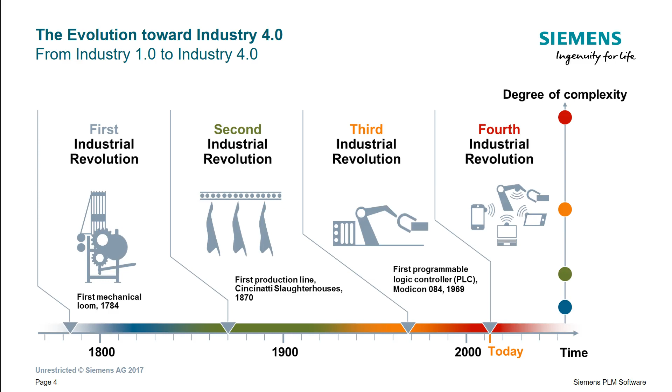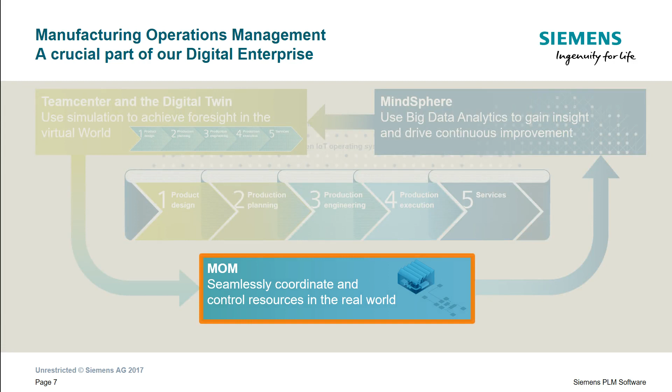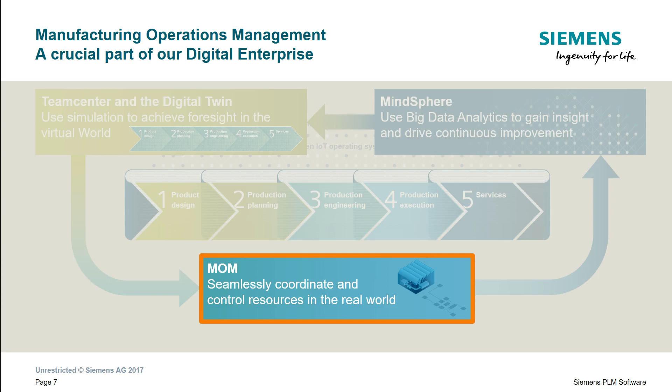Today I would like to focus on one of the three main elements of our portfolio, which is the manufacturing operation management part. This one is highly representing the realization piece, when we're talking about the manufacturing plants. Here's where we see a holistic view also, and this is what we call the orchestration of all the disciplines within manufacturing.

So when you start with the download of any customer order that you get, and break it down according to your capability and resource availability into a production order, schedule this and dispatch it to the execution, which allows you to bring the instruction to the workers at the right time, the right act, in the right form, and capturing everything the order is experiencing - whether consumption of material or evidence of non-compliance or non-conformance, quality data as we come to execution.

So really to provide the steps that a worker needs to carry out in order to measure the quality of a product, but also the process itself, if you're talking about statistical process control. So to see which tolerances, which deviations the system and the process are giving, in order to understand how this deviation might impact the final results of the finished good.

The reporting piece, of course, and the genealogy, in order to know exactly how a product has been built. It's very important to have the as-built product with all the genealogy, comparable to as-planned - what was really in the original order - so that we can have evidence of non-conformance or non-compliance to what the customer is expecting, as an example.

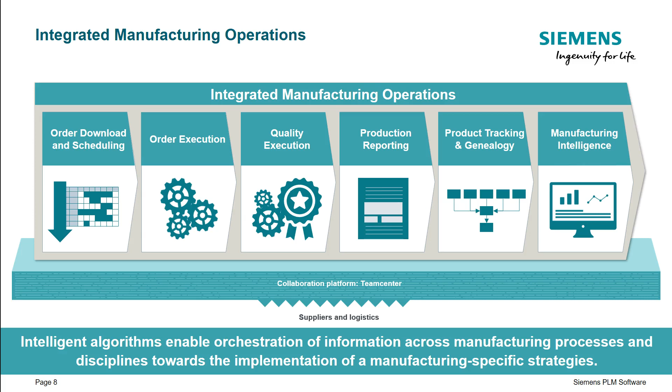Now, what we are doing is, I would say, the challenging side of acquiring companies, as Siemens is doing. One example is Mentor Graphics, the 8,000 employees that we're getting on top with a huge portfolio in the electronic industry - to unlock synergies between the products, and also to build a sustainable roadmap and product that can help really realize the digital enterprise. So we are heavily challenged in finding the right combinations for manufacturing.

And of course, we're not only looking at unlocking synergy by integrating pieces of our portfolio. We're really looking at a bigger family, which is the PLM offering, where we are heavily looking at how we can close the loop and let the manufacturing area become a source of improvement for the engineering part. So here's an example I'm going to show you in a while.

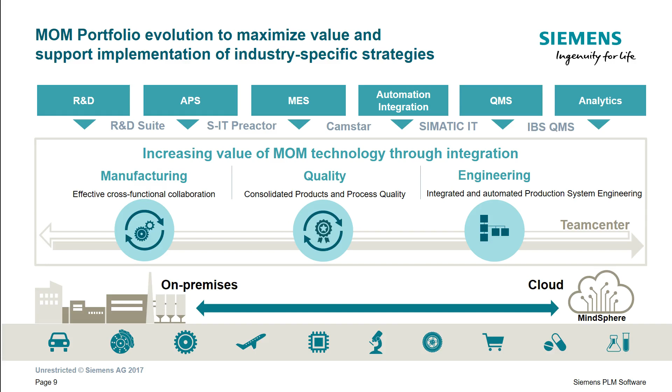Let me start with some use cases. I brought some videos just to explain it better, how it works. I'll start with the first one.

This is the way you start basically in getting your manufacturing efficiency done. It's what is called the advanced planning and scheduling tool. It's very important that at the beginning you match your demand with the capability of your plant and the variancy you need to build. So this tool is basically helping simulate, in a simulation environment, seeing what your manufacturing is able to digest.

You're coming to a certain time window, 24 hours, 48 hours, where you are now really in the moment where you need to release a certain number of orders that you have in the pipe. This tool helps with an intelligent algorithm to really get you the best sequence for your production.

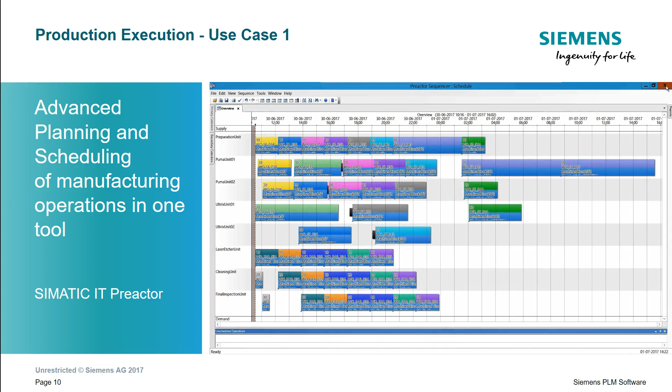Now, once orders are dispatched through this tool and come to execution, I'm pointing at a second video, which is how we make use of the engineering data. Once we have really planned the product and the production, you have a very valuable amount of data, like the bill of material and the bill of process.

So you have all the data like part programs, electronic work instructions, materials. You can use this data, if you really link it together with the operation system, to automatically populate the manufacturing operation management system in the first step, because you're getting this data already there.

So you can configure dynamically an operator panel, if you're talking about a worker, as well as a supervisor on his iPad or your smartphone. This is the way you make use of the data already available, and not create redundancy or have a second source of data.

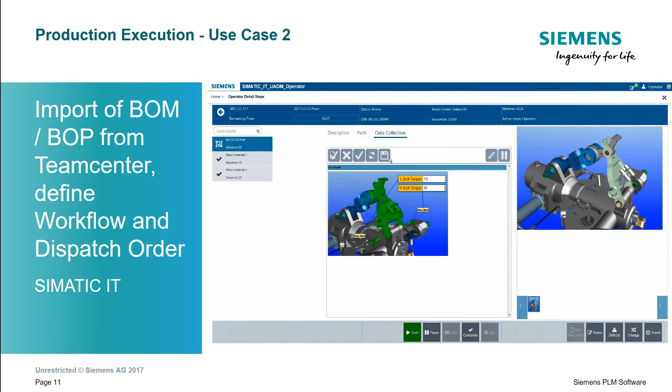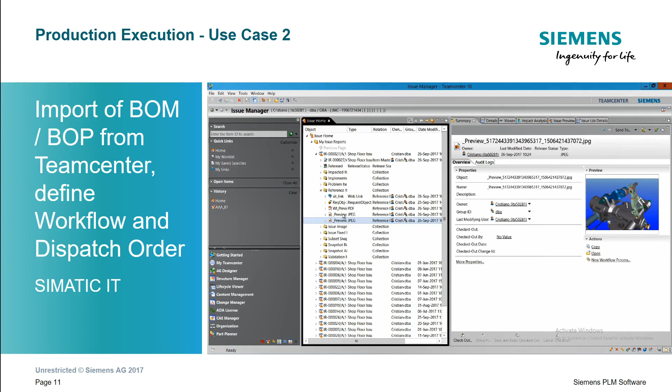This problem is then reported to a supervisor who decides whether it should be forwarded back to the engineering part. It is in this tool, Teamcenter Issue Manager, where you can browse it down, go directly to the issue, look at the contextualized information in the manufacturing operation management tool, and then understand whether it is time to take an action and improve the process.

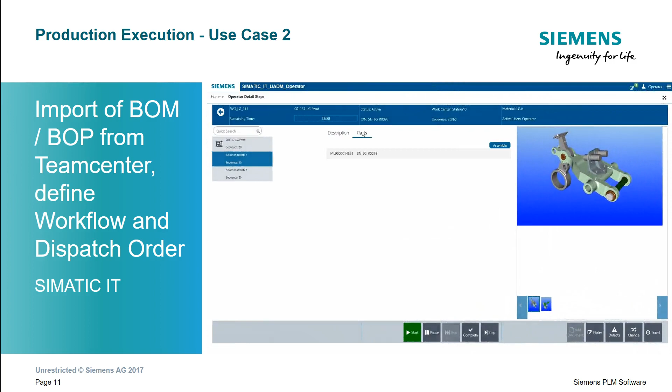Again, this is only a snapshot, but I'd like to show this as an example about aerospace and defense application. Now I'm going to show you a similar example for a medical device, which is based on another product, but the same concept.

So this is Camstar. We are browsing and using exactly the JT models to have, on the line, on the machine area, the possibility to look at the product, to call for some documentation. Even in the next release, you will have videos showing from the simulation already done, showing how to behave when it comes to mounting pieces together.

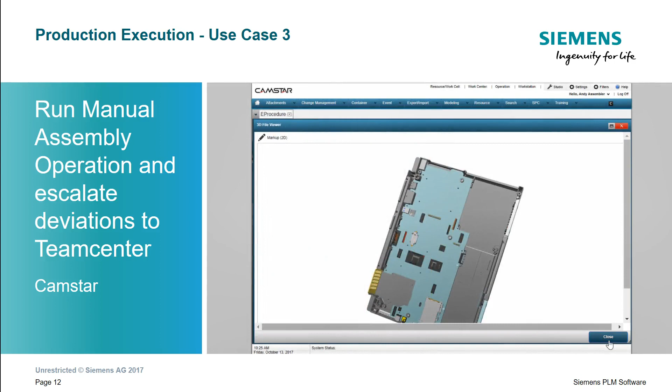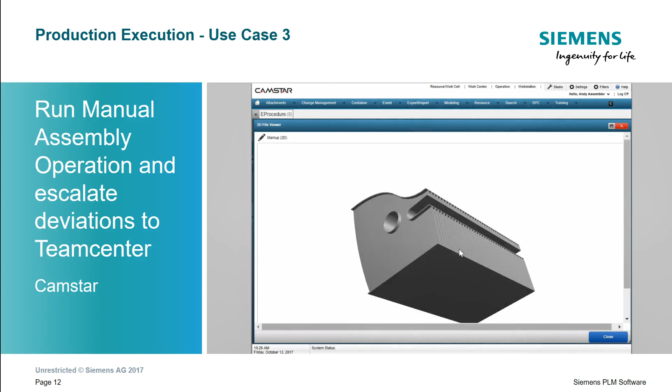So here's the housing with the PCB, and here you can make a snapshot of what is a possible deviation and send it back. Same process as displayed before: send it back to the supervisor, and the supervisor decides whether to send it then to Teamcenter Issue Tracker and get a suggestion for an improvement.

Another example of interface, this time from our last acquisition. Mentor Graphics has a business called Valor, which is probably pretty well known as a leading provider in PCB and box build electronics.

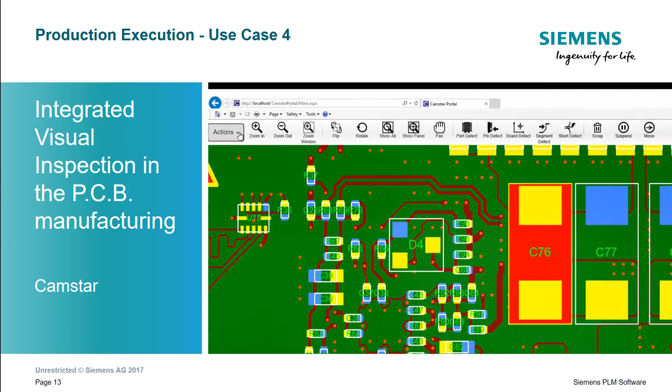What we are doing is combining the capabilities of displaying PCB data with the operator interface, giving the operator a visual inspection to highlight any deviation, show the defect on the PCB board, and enter the measures taken to replace or repair it, collecting this data and making it available to engineering. This is where we're currently working on integrating the portfolio with the Mentor Graphics acquisition, and we're getting evidence we can provide real value add in this area.

Another example is combining MES capability, execution, with quality. We're using HTML5 to display and combine information, so there's no need to take two different data storages and merge them when talking about integration. The first intelligent step is to combine and compose data on the interface, so you don't necessarily need to make a big bang change.

The last example is the more classical way we're bringing the first pieces of the manufacturing operation management portfolio capability to the cloud. This is currently manufacturing intelligence, where there are a lot of providers in the market, and we have acknowledged this and brought our own manufacturing intelligence to market.

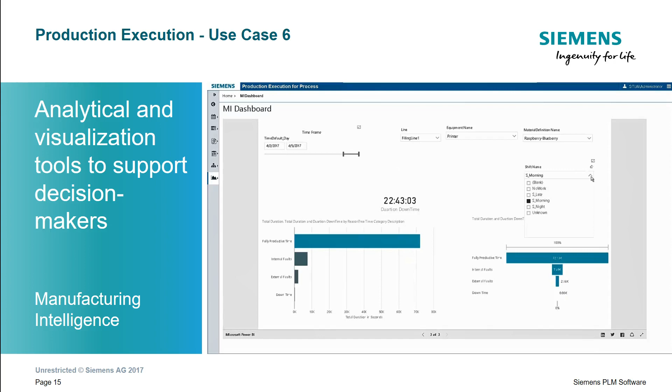Having seen this, I'm stepping back to refer to MESA, which Siemens is part of. You'll probably see there was a session related to MESA. We contribute because we need a general understanding, not just Siemens-specific, but to confront ourselves. MESA is a great opportunity to be with other vendors, manufacturers, and system integrators.

We've engaged together in different streams. One is how to give awareness about smart manufacturing—what it is and what aspects executives or decision makers need to know about it. It's not only about a holistic view of integrating intelligence and making that intelligence from different resources available in a holistic approach.

It's very important to look at change management. When implementing digitalization, as we do at Siemens in our energy and automation plants, there's a lot of effort needed in sharing the strategy with employees, getting them involved early, making them aware of the opportunity, and mitigating any risk they think they'd face. This is one of the things we all agree on suggesting when implementing digitalization.